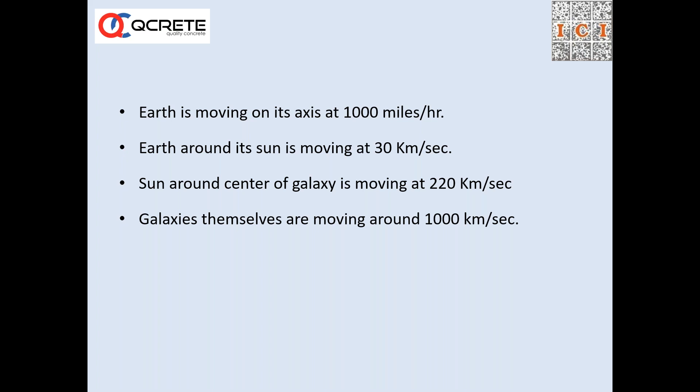We have seen many catastrophes, and many things have not been recorded for the last 40 years. Recently they have found an 8,000-year-old archaeological site in Saudi Arabia, which completely shifts our understanding of human civilization and the way it existed.

We had until now 5,000, 6,000 years of history. Now they have found settlements in Saudi Arabia in the middle of the desert, in a place called Al-Faw, where they're talking about the existence of irrigation and canal systems, which is unbelievable, given it's a desert. We know Saudi Arabia as a desert, and there is no such irrigation system possible, but it was there. Something happened—a small shift in the axis of Earth, or a small tilt in the way Earth spins around the sun, or something like that, which we don't know, has caused all this.

So we are adding our own things to this unbelievable and unimaginable world. We are also trying to add our own bits that spoil the atmosphere, which is causing huge damage to it.

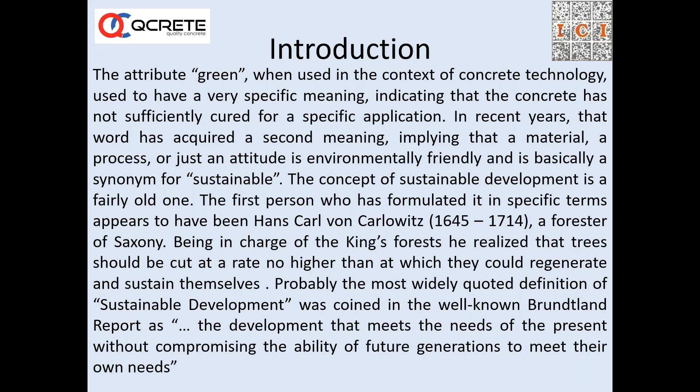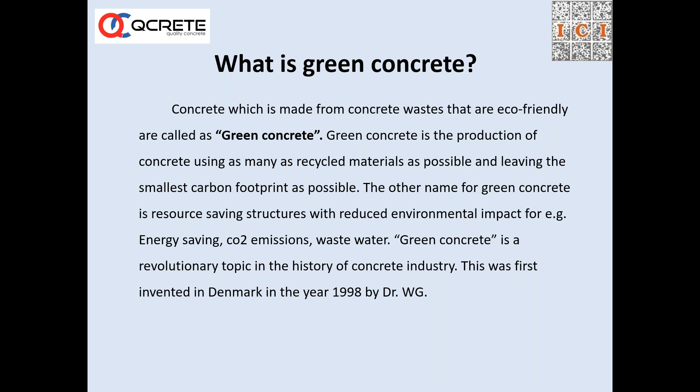So green concrete is one which is eco-friendly, where there is usage of industrial waste and recycled materials, and which has a reduced impact on the environment. This concept itself was introduced by a Danish person, Dr. W.G. So if you want to do green concrete, we need to first be aware of the materials that help us do green concrete.

They can be classified into three categories. One is the very popular materials in India: fly ash, GGBS, microsilica. These products also include rice husk ash and even metakaolin. But generally in India, we talk about abundant usage of fly ash, GGBS, and microsilica.

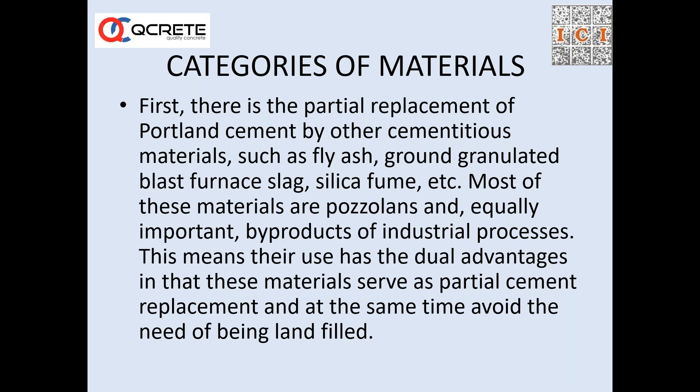The next category of materials are already-used materials: post-consumer glass, recycled concrete, scrap tires, plastics, carpet fibers, and all kinds of fibers, and fillers which can be used in either cement or concrete, like limestone filler. Cement is blended with 10 to 15% limestone powder—that also falls in this category.

So generally these materials are waste products or byproducts of other streams. In India, the usage of this category of materials is very limited at this moment, but sooner or later it is going to pick up.

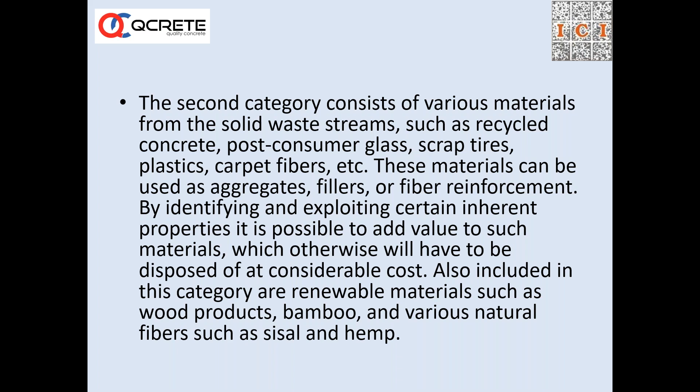The third category is a big one already in use in India. It consists of materials which help us reduce cement consumption, increase strength, or add other properties to concrete. For example, admixtures help us transport the concrete, alter its setting time, and add many other properties. There are also other novel additives that help reduce cement content, commercially known as iQcrete.

These kinds of products help us make better mix designs compared to reference concrete mixes. Then there are other materials which can be added to reduce thermal conductivity. And many other materials are available, like carbon nanotubes, graphene oxide, and these products which can also help improve the properties of concrete.

There are other technologies now where we are talking about curing concrete by using carbon dioxide. One of the companies, CarbonCure, is making that. These are the third category of materials, so the different categories of materials can be combined and effectively harnessed to make green concrete.

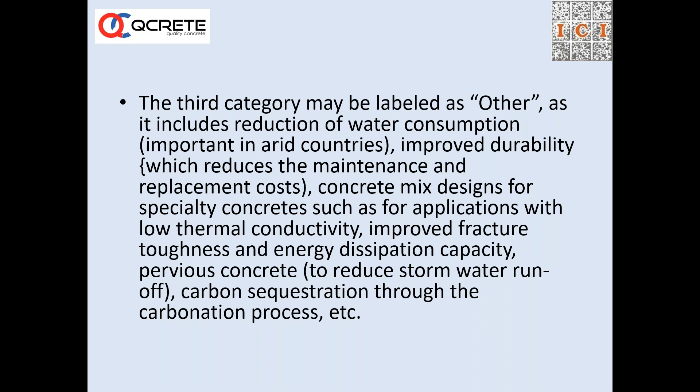The aim of green concrete is to reduce environmental impact of concrete, basically. Together with this, when the designer starts trying to do green concrete, he takes help from structural design specification, manufacturing, maintenance, including all aspects of performance, where there is a consideration of mechanical properties, fire resistance of the material, workmanship, durability, thermodynamic properties, and most importantly, environmental impact. So all these are considered, and especially durability is one of the major aspects of green concrete.

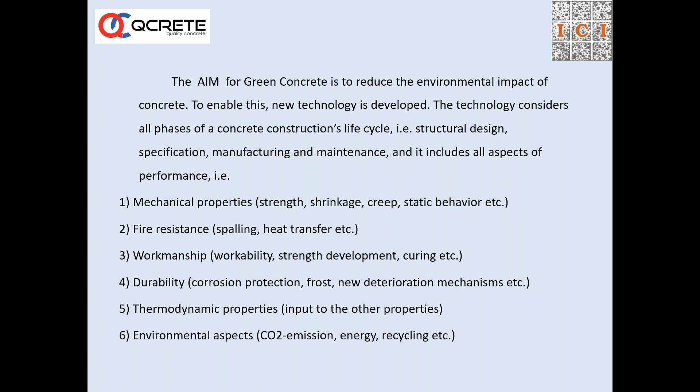So when we are talking about green concrete, we also go with the term sustainability - meeting the needs of the present generation without compromising the ability of future generations to meet their needs. So anything we do today should not deprive future generations of getting similar materials at approximately similar costs. For example, we are using concrete or cement now. Let us say in 50 years, cement costs 15 or 20 times the present cost. That becomes a costly affair and discourages the usage of cement itself, so that becomes unsustainable.

An American Indian proverb says, treat the earth well. We do not inherit the earth from our ancestors; we borrow it from our children. A beautiful proverb which puts a big emphasis on the type of usage we have to do with respect to natural resources.

Of course, in India, 5,000 years back, there is a lot of literature written where it talks about not cutting trees because they remove pollution, not disturbing the sky, and not polluting the atmosphere. So this kind of literature is already available in India.

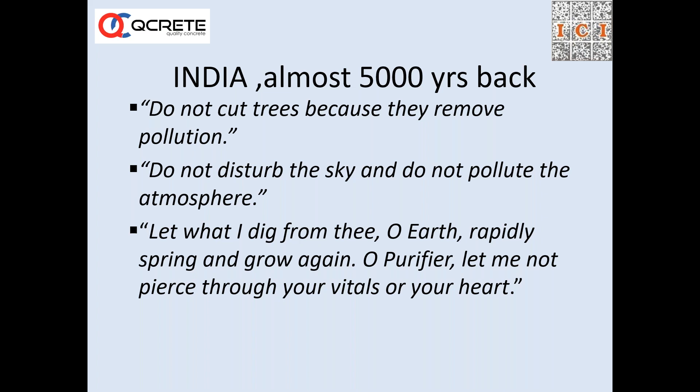Most recognized sustainability programs primarily focus on energy conservation, atmosphere, water quality and resources, site selection and development, indoor environmental quality, and material quality and resource. It is these complex relationships that present challenges for achieving greater sustainability.

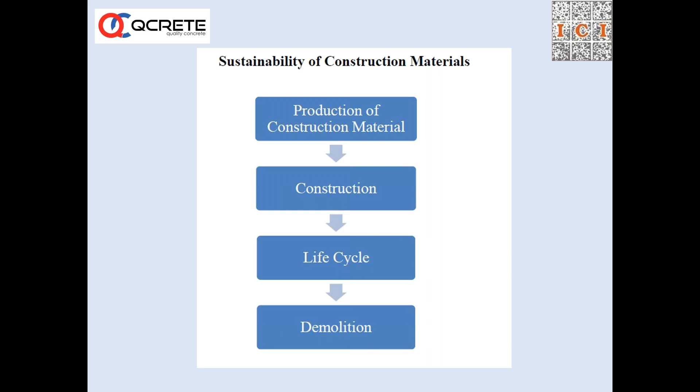So in terms of construction materials, whether it is concrete or any construction material, there is production, construction, life cycle, and demolition. The figure shows various stages of construction materials. Any type of construction material is produced with some raw materials or combination of raw materials, and production is associated with the consumption of energy and releasing some quantity of waste. Therefore, the production phase is important to consider while we deal with environmental impact.

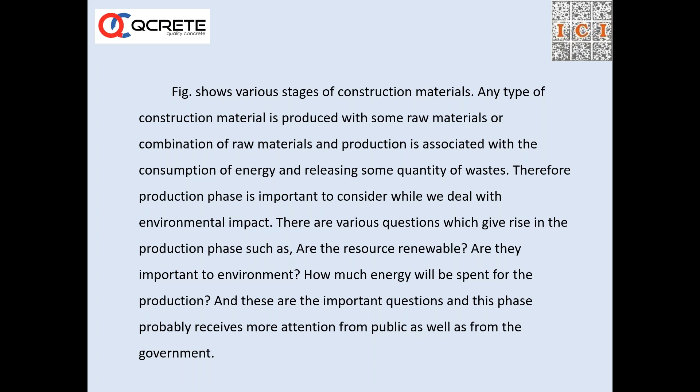There are various questions that arise in the production phase, such as: are the resources renewable? Are they important to the environment? How much energy will be spent on production? These questions are important, and this phase probably receives more attention from the public as well as the government.

So two important concepts of sustainable development: meeting the essential needs of the world's inhabitants, and recognizing the limitations of technology and society's ability to meet present and future needs. So sustainable development, including construction and concrete, should consider how land is used, water is used, atmosphere, judicious usage of material resources, indoor environment, and work environment.

For example, concrete, every cubic meter of concrete, we use about 180 liters of water. For curing also we use water. This is a huge activity for curing and for production of concrete. In fact, in ready-mix companies, many have started recycling wastewater after cleaning the trucks, which is a very good development. Even still today, many ready-mix companies have the habit of using fresh water for washing the trucks. So usage of water is going on unabated without any hindrance.

We have to know here that only 4% of the total water available on this planet is fresh water, and in that 4%, some of the water is locked in glaciers and icebergs, and also some of it is locked on the Earth's crust.

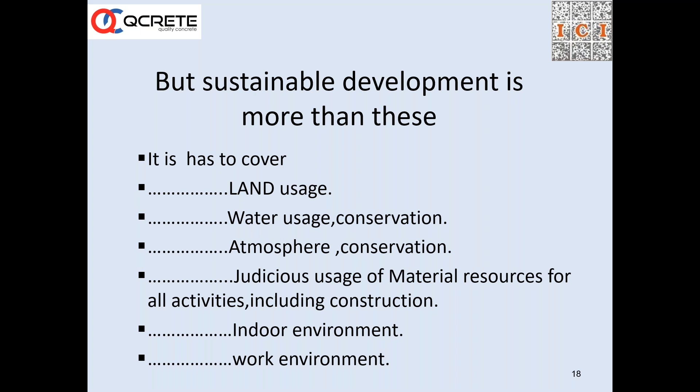Having said all this, concrete is still a wonderful material. Its impact is least when compared to steel and wood. So if somebody is constructing a building just because he wants to construct quickly for convenience, the impact they are causing on the environment is higher than a concrete built or a mud built home.

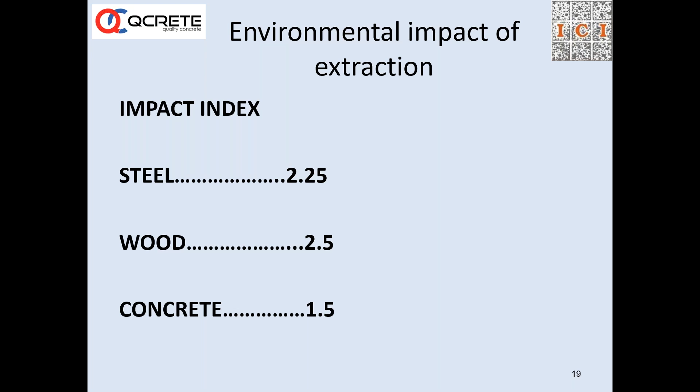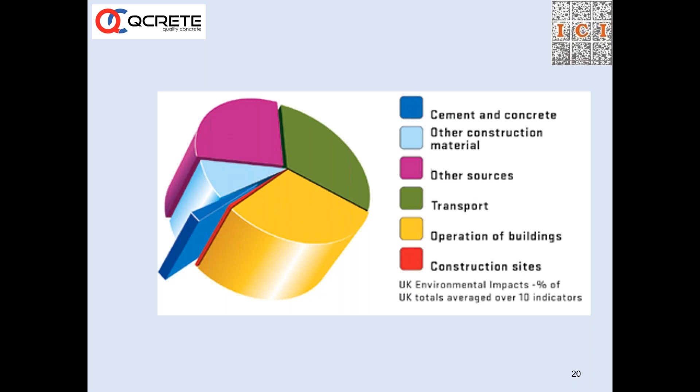So here we see, even though cement and concrete has the least impact on the total environment when compared to other activities of human beings like transport and operation of buildings, etc., still we have something to control. We can control what we can control as civil engineers and concrete technologists. So we have to focus on this cement and concrete.

So what is the problem with concrete? The problems are rooted in the manufacturing of cement, material acquisitions, and use of water. As we said earlier, use of water and then cement. If we are manufacturing 1 ton of cement, we need 1.55 or 1.6 tons of limestone. It has to be quarried, transported, and crushed. And this is a very energy intensive process.

And the next point is the OPC. As we are manufacturing it, it generates about 800 to 900 kg of CO2 per ton of cement manufactured. And OPC is the one material which is a synthetic product in the concrete, and it tends to go back to its natural state. So limiting the OPC is prudent and important because in that way you are increasing the stable components of concrete.

We also know that if we increase cement consumption in concrete, every 100 kgs of cement increased per cubic meter will give rise to a temperature rise of about 11 to 13 degrees, which will increase the core temperature of concrete. And the temperature differential, if it goes beyond 13 to 15 degrees, thermal cracks will be there in the body of concrete, which will make the concrete deteriorate faster or become undurable.

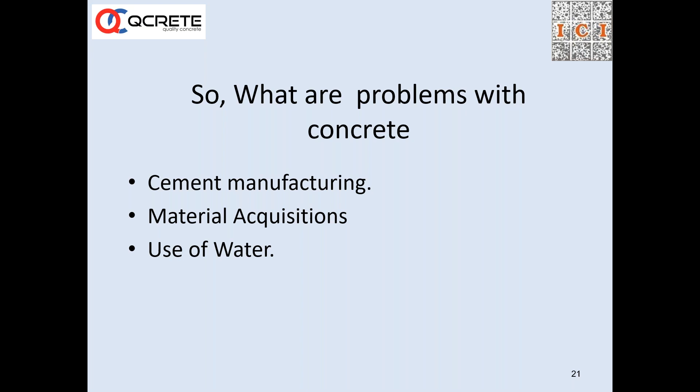We can see here 6% of carbon dioxide emissions come from global cement production, which is huge. Aggregates and sand involve huge mining, crushing, and transportation. Billions of tons of aggregates are crushed and transported for making concrete every year, so this is not a small thing. Earlier, sand mafia and dredging of sand have changed the paths of rivers, and many times it has completely disturbed the environment in many areas.

Now, thanks to the introduction of so-called manufactured sand or crushed rock fines, which is a byproduct from the stone industry or crushed rock industry, we have a better situation. We are moving towards more sustainable concretes due to 3-stage VSI crushers, etc., where judiciously good graded sands based on crushed rocks are coming out.

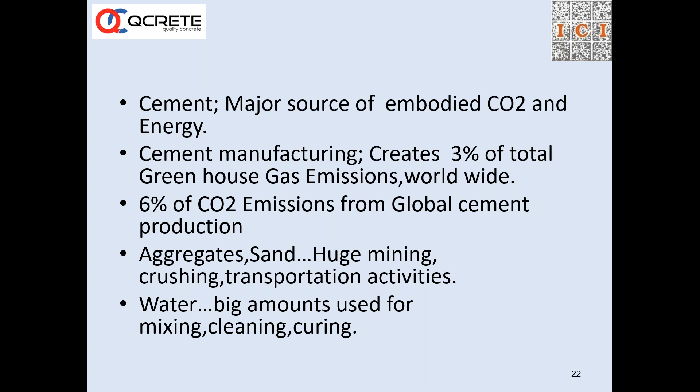As we already discussed, water is being used in big quantities for mixing, cleaning, and curing. One of the authors, I have forgotten the name, says 50 billion tons of aggregate is crushed and transported, and it is enough to make a blanket over the entire United Kingdom.

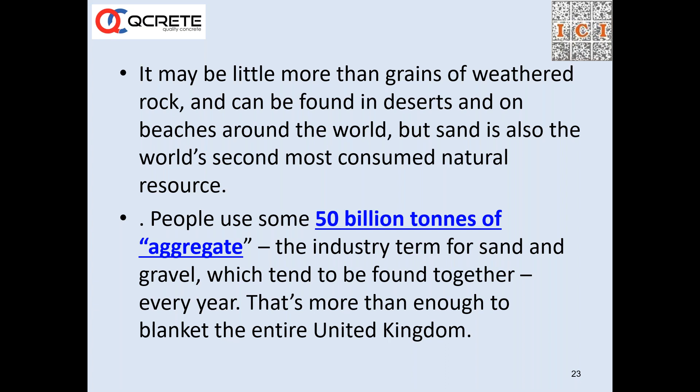Sand is also being used for making glass, which is another important material in the construction industry. Together, manufacturing of glass and manufacturing of concrete constitutes a huge portion of sand usage, which is environmentally bad. So what is the green approach? The green approach is to become environmentally responsible.

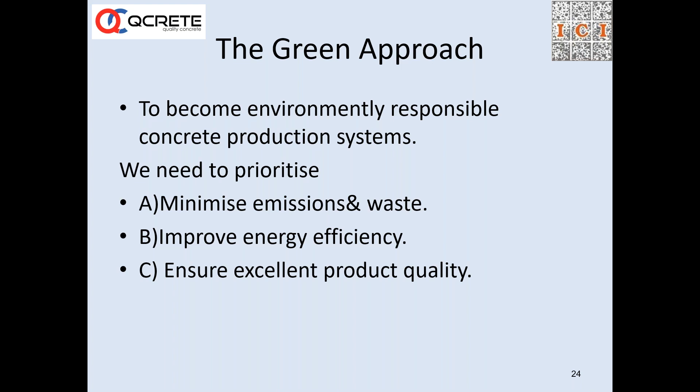We need to make better concrete production systems, minimize emissions and waste, improve energy efficiency, and ensure excellent product quality. By having complete control on the mix design, water-cement ratio, and usage of good materials including SCMs, we can ensure better quality and reduce emissions also.

So reduce concrete usage by reduction of thickness of members, use less binder material—especially OPC, as we have discussed—use supplementary cementitious materials, and use high performance chemical admixtures.

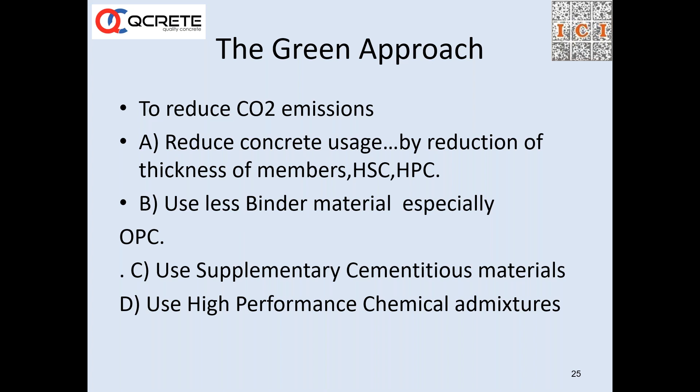The scope in India is huge, because India is the second largest manufacturer of cement in the world after China, and ready-mix concrete is still growing faster. We have the infrastructure and huge projects coming up in infrastructure and other segments of the concrete industry. Being concrete technologists, we can utilize the experience and knowledge to make greener concrete and make a positive impact on the environment.

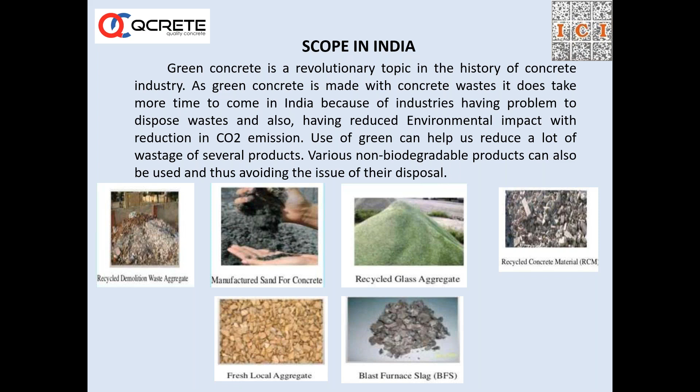One of the most significant contributions by the ready-mix industry in India, starting from I can say 2000 to 2022—the last 15-20 years—is the good increase in usage of pozzolanic materials, especially fly ash and GGBS. You can see most ready-mix companies either using GGBS or fly ash, and we have modern concretes which have been absorbed by the ready-mix concrete industry, having a positive impact on the rate of construction and quality of construction. There is also significant usage of industrial waste like fly ash and GGBS.

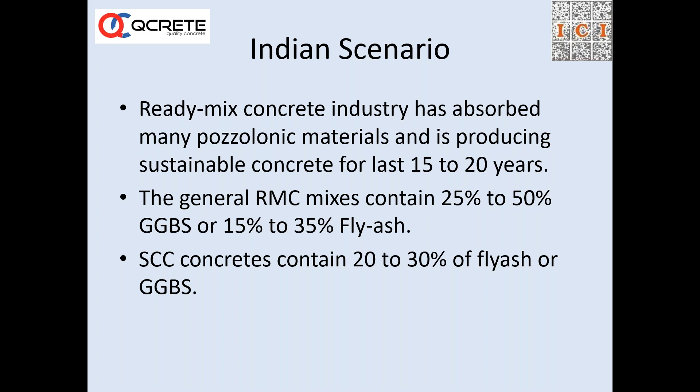Use of pozzolanas, it goes without saying, helps make durable concrete—here is how these pozzolanic materials contribute. This is the basic microscopic structure of different materials: fly ash, Portland cement, and slag. What I want to bring to attention here is that fly ash particles are spherical in nature.

When the particles are spherical, it gives better workability, and it is said that if we replace about 25% of a mix with good quality fly ash, it gives a water reduction of 6% to 8%. When this water reduction happens, automatically the durability and other properties increase.

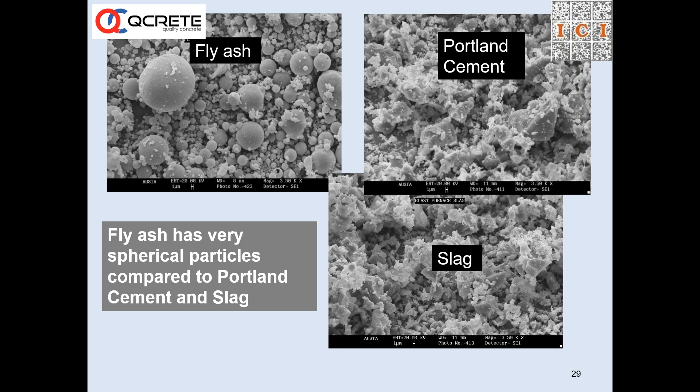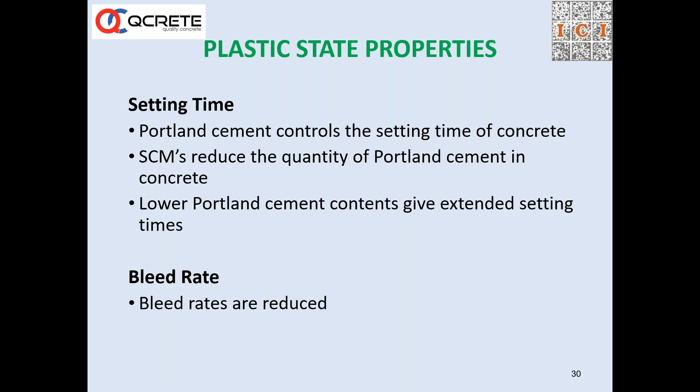We have seen huge usage of fly ash and GGBS, and the contribution to the concrete industry by these two materials, apart from making concrete greener, is that the setting time is better—I mean setting time is longer, which allows the user and concrete producer to use the concrete for a longer period and transport it for longer distances. Bleed rates and other things are improved, cohesion is improved, workability is significantly improved especially with fly ash, and pumpability is improved.

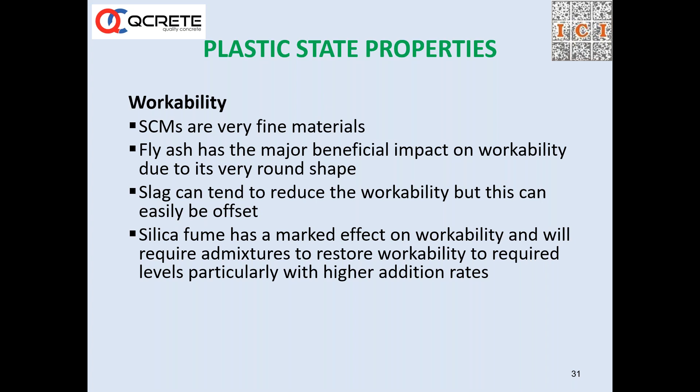Silica fume, in this direction, is a killer of slump—it means it reduces the slump, but of course you can compensate that with usage of better admixture or higher dosage of admixture. Pumpability and finishability are definitely better, and hence the cover concrete becomes denser if the finish is good, so chlorides and sulfates cannot easily penetrate. If the finish has a lot of blemishes like crevices, chlorides and sulfates can enter. So the concrete cover becomes denser, better.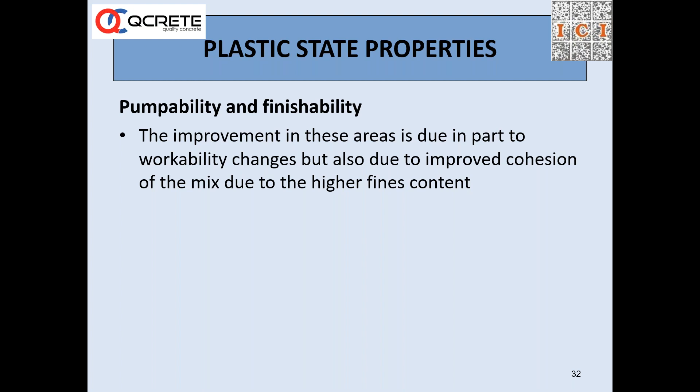This is one of the favorites that we always talk about: the strength. OPC is a dead horse after 28 days, meaning it will not gain much strength after that. But when you blend OPC with GGBS or fly ash, the curve goes up significantly, contributing to higher strengths at later ages. So OPC cannot match these supplementary cementitious blended concretes.

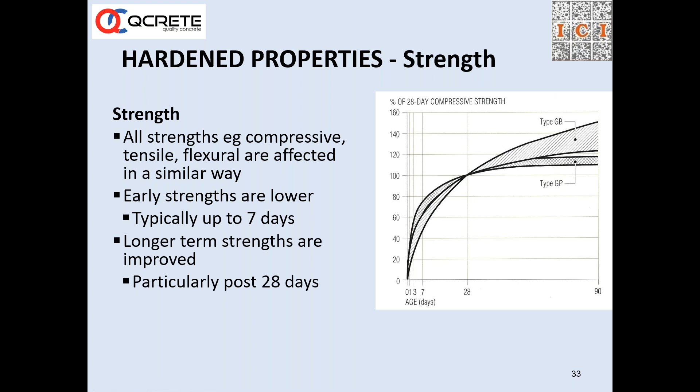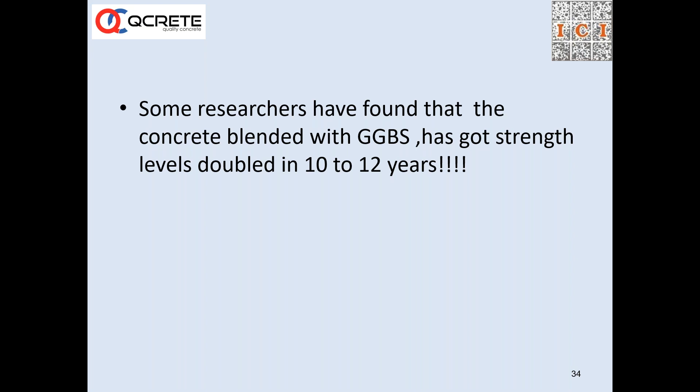Some researchers have found that when concrete is blended with 50-60% GGBS, the strength levels have doubled in 10 to 12 years. A customer who theoretically has a 30 MPa concrete will probably end up with 45 or 50 MPa, based on the type of reaction and the reactivity of both GGBS and OPC. He may end up with M50 concrete after maybe 10 years. So this is a huge contribution in terms of strength, and we'll come back to durability later.

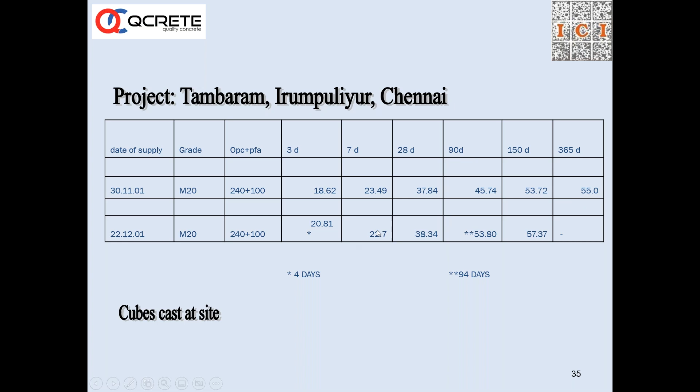This was one of the cubes cast on site, on a church site in Chennai, and we can see the jump between 28 days to 365 days, from 37 to 55 MPa. This is fly ash from Ennur near Chennai.

Several, I can say thousands of results, each an average of 3 cubes, were taken from Coimbatore, with fly ash from Tuticorin and several brands of cement. We can see a significant jump of 40% between 28 days to 90 days.

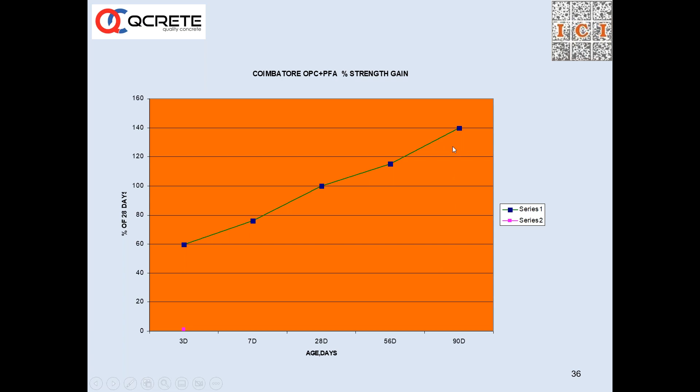Temperature rise is less when you are using GGBS or fly ash. GGBS lowers peak and overall heat, reduces thermal stress, and reduces micro cracking.

Optimum substitution is 60 to 70%. IS code permits usage of GGBS between 25 to 70%, but there are many projects in India where they use only 10% or 5%. If we use very little of this material just for the sake of using it, it will not enhance performance. And if there's already a quality problem with the cement itself, this adds to the problems. So it doesn't give any result at a very low dosage. We need to add approximately 35 to 50% to get good performance.

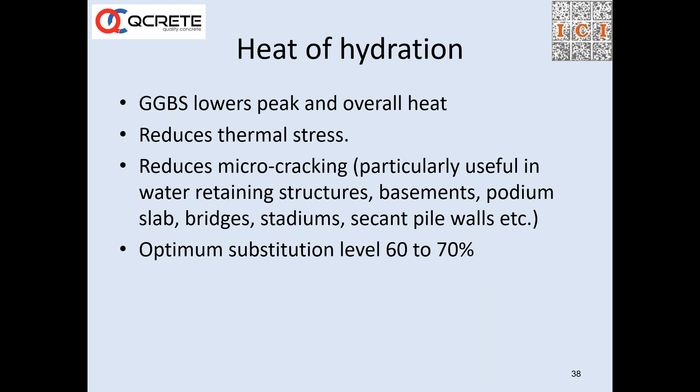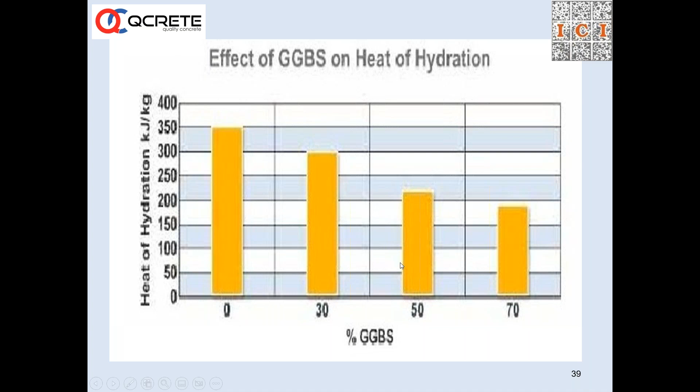I'm talking about GGBS. In terms of heat of hydration, when you have 70% or 50% GGBS, there is a tremendous reduction in heat generated, which helps contain the total heat in the initial stages and enhances durability eventually.

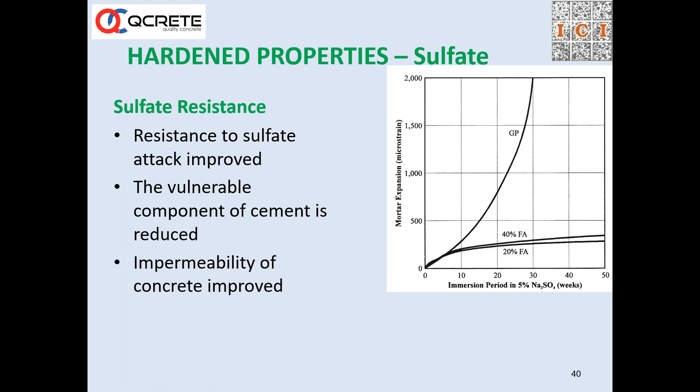Sulfate resistance is another aspect significantly improved by addition of pozzolanic materials. We can see here fly ash addition of 20 to 40% against general purpose normal cement, where expansion goes almost parallel to the x-axis, meaning expansion is less. Expansion is maximum when you're talking about OPC. So resistance to sulfates is enhanced, and resistance to chlorides is enhanced.

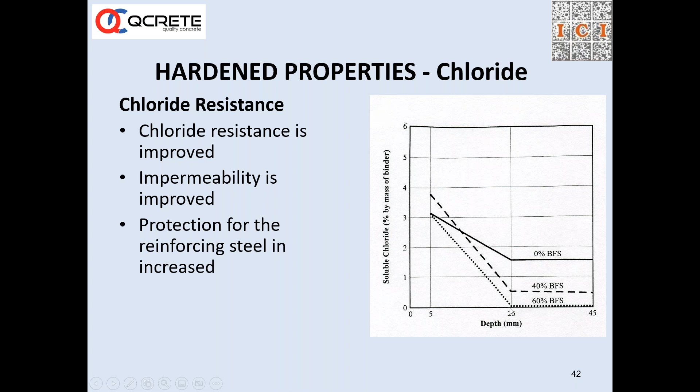We can see here when adding 60% GGBS, there is no chloride penetration at a depth of 25 mm in a concrete system.

So, resistance to chloride - another slide talks about time to corrosion initiation. When 60% is added, it takes 50 years for corrosion initiation. Whereas with 100% OPC, we have very quick initiation within about 10 to 12 years, and the time of first repair is here.

So what is this important thing we are talking about? When we are making green concrete using GGBS or fly ash, the durability is enhanced. You have long-lasting structures, and hence you need not repair them. You need not invest again in bringing new materials, new raw materials, new cement for construction - and hence your overall sustainability is improved, durability is improved.

It is estimated that in many countries, there is a huge cost waiting. For example, in India also, as bridges and infrastructure get older, if there is gross negligence in these areas during construction, and materials were not used properly - if some of these SCMs, especially GGBS or fly ash, are not used in the right quantity - repairs will come much faster, and the repair costs are huge, with a huge impact on the national economy.

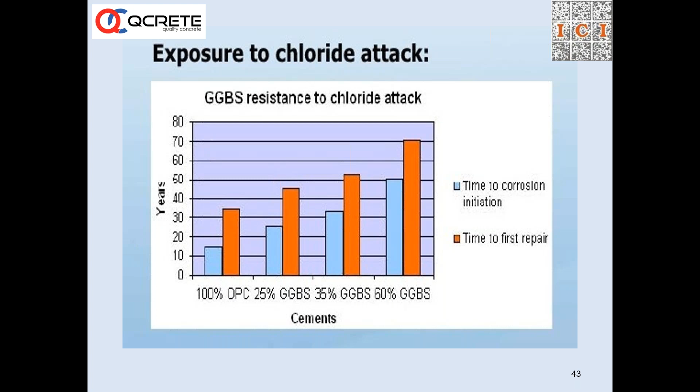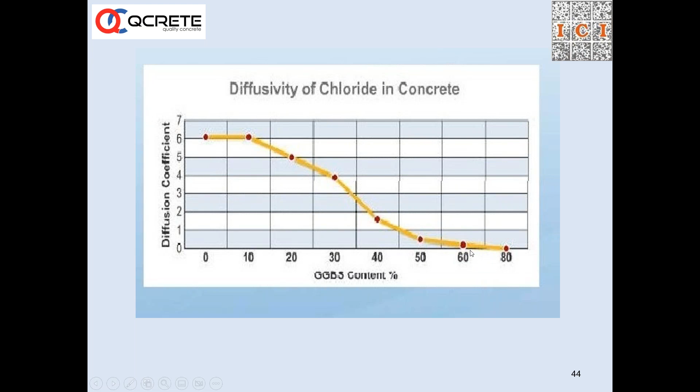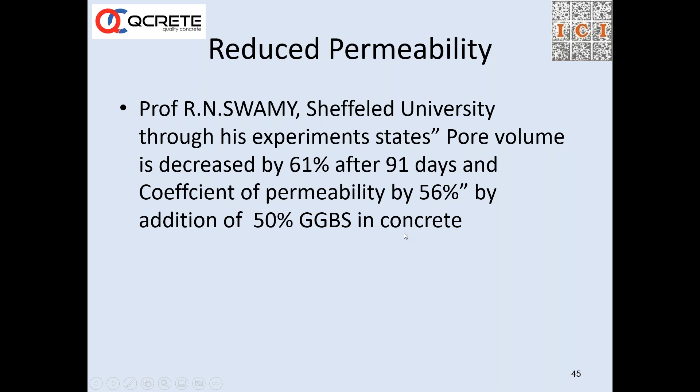Another slide showing the diffusivity of chloride when GGBS usage is increased between 60 to 80%. At that range, diffusivity is almost nil. Professor R. N. Swamy says there is a tremendous improvement in permeability, with a reduction of almost 56% when 50% GGBS is used. So there is tremendous possibility of enhancing durability when using fly ash or GGBS.

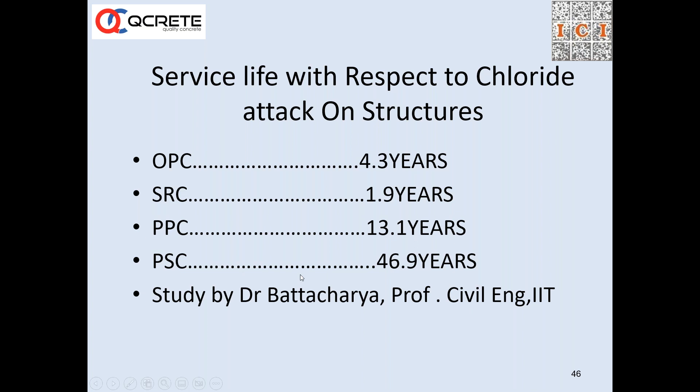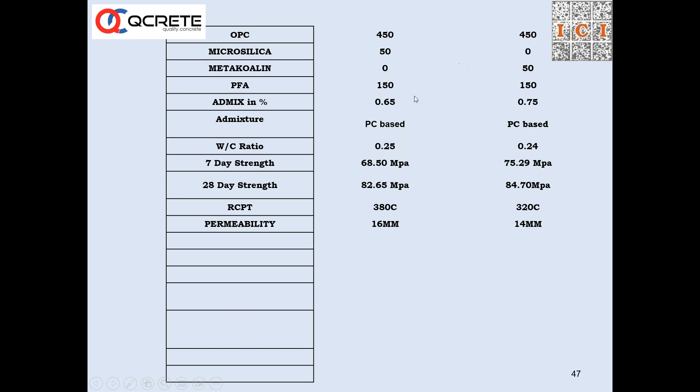Professor Dr. Bhattacharya of IIT has talked about service life with respect to chloride attack - what happens to different materials when chloride attack occurs. If concrete is made with only OPC, you can compare that with PSC. Different materials like microsilica, metakaolin, and fly ash can be used to make highly durable concrete. RCPT values below 500 represent highly durable concrete in a chloride environment like coastal areas, so you can push concrete to higher durability using these materials.

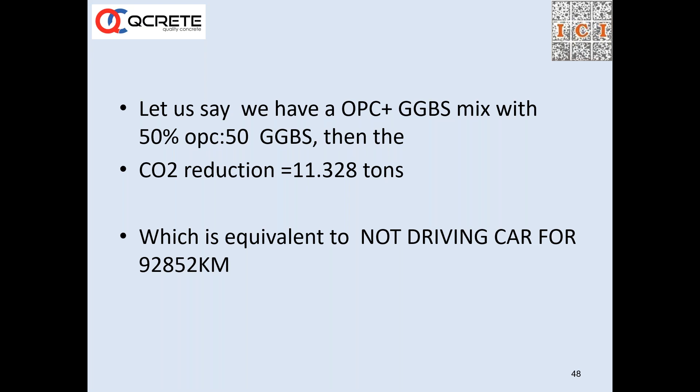An example is given: let's say we do an OPC plus GGBS mix, 50% 50%. They have calculated this is equivalent to not driving a car for almost 92,000 kilometers. So if we do such mixes wherever possible, and try to change the specification and convince the specifiers to use GGBS, we can contribute to reducing carbon dioxide emissions in a big way.

Another positive impact of using GGBS or fly ash is that, being lighter in color, it contributes to reflectivity of light, represented by the albedo value. Snow has an albedo value of 0.9, while black paint has an albedo of 0.05, meaning black paint absorbs most light. If you have 50% GGBS concrete, the albedo number is around 0.5, meaning reflection will be better.

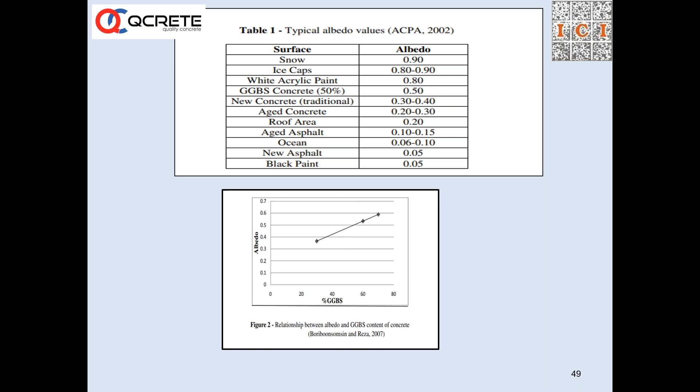People can see better for longer distances, and lighting required is reduced - you don't need as much lighting. This means you can reduce the energy consumed for lighting. This is an additional effect of using these materials, which helps make concrete and construction greener.

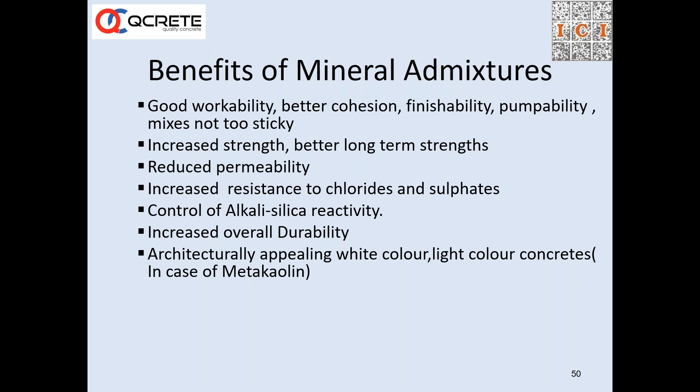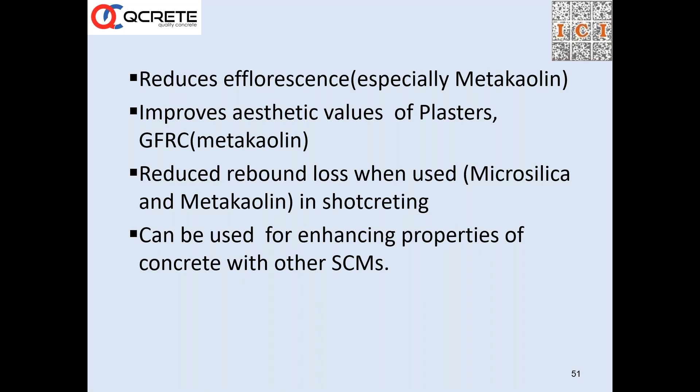In short, benefits of mineral admixtures include: good workability, better cohesion, finishability, increased strength, reduced permeability, increased resistance to chlorides and sulfates, control of alkali silica reactivity, increased overall durability, and architecturally appealing light-colored concretes. If using metakaolin and similar materials, it reduces efflorescence, improves aesthetic values, and reduces rebound loss in shotcreting - these can be used for enhancing properties of concrete with SCMs.

If we compare different materials in terms of embodied energy - the energy used for production and transportation - we can see that for transporting any of these materials it's around 175 to 100, and aluminum has higher embodied energy during production compared to Portland cement.

So even with all the people blaming concrete and cement, cement is still a good material that we have to use. We discussed negative things about OPC, but positive things exist too - quicker construction, quicker stripping of side shuttering, and things like that. OPC is still head and shoulders above, unless you're using a very advanced admixture with a certain percentage of SCM. So OPC is still a winner in some cases, not bad.

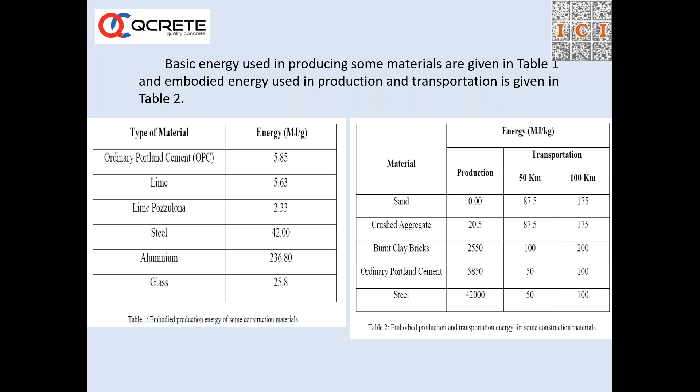So what are the carbon dioxide reductions possible if we use SCMs? For a 335 kg mix with 0 kg of fly ash or 0 kg of GGBS, the carbon dioxide emissions are 313 kg per cubic meter.

If we go to 282 kgs of cement and 94 kgs of fly ash, it comes down from 313 kg per cubic meter to 160 kg per cubic meter. And when we go to the same mix with 376 kgs of OPC, now 188 OPC and 188 GGBS, it has come from 211 to 112, almost 50% reduction in carbon dioxide emissions. So if we can shift from one mix to another, we are moving significantly up and making better, greener concrete.

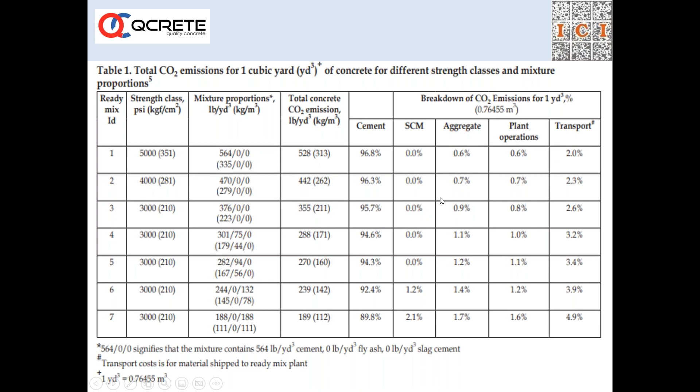Suitability of green concrete in structures: it reduces the dead load of structures because the density of concrete made with SCM is slightly lesser compared to concrete made with OPC. A reduction of emissions by 30 to 50%, let's say 30%. Increase in concrete industry's usage of waste products by 20%. Good thermal and fire resistance compared to traditional concrete. Improvement in permeability and usage of new types of residual products, like red mud and many other products.

I want to talk a little about the usage of recycled aggregates. Recycled aggregates have not picked up so well in India. In other countries, recycled aggregate and recycled fine aggregate from building waste is being used successfully, especially in countries like Japan. They use a huge amount of this building waste incorporated into their concrete.

The problem with using recycled coarse aggregate and recycled fine aggregate is it also comes with some other building waste, like probably gypsum and paint, etc. So putting all this into concrete will not give similar or better strengths, and it has to be added in a controlled way. Even though we can classify this as greener concrete, it many times becomes costlier because the building waste has to be transported to a crusher and then crushed, and collection, transportation, and crushing will take some time.

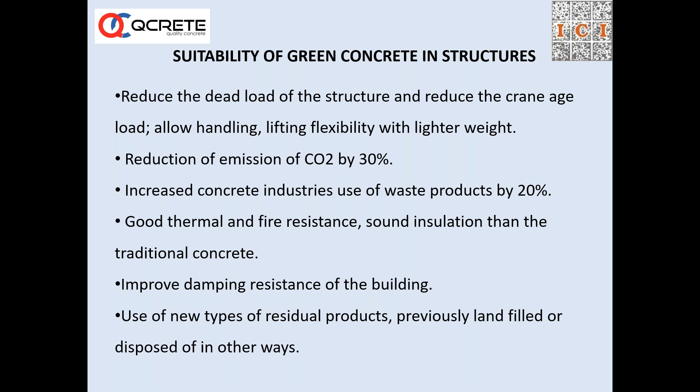Coming back to suitability, it requires less maintenance and repairs. Compressive strength behavior of concrete with water cement ratio is more than that of conventional concrete many times. Flexural strength of green concrete is almost the same. Carbon dioxide neutral waste-derived fuels shall substitute fossil fuels in cement production by at least 10%.

Use of concrete industry's own residual product - in a way, ready-mix concrete has contributed well. Many companies are using 25% to 50%, sometimes 100%, of the wastewater generated to be incorporated back into the concrete. So greening of concrete is going full swing.

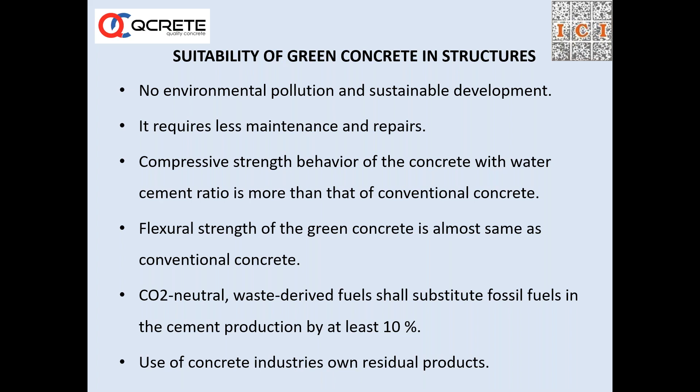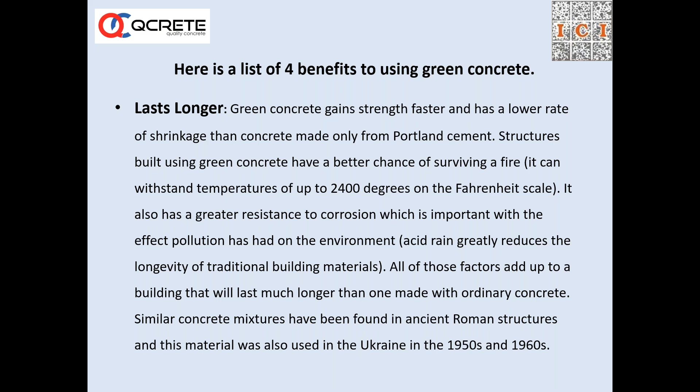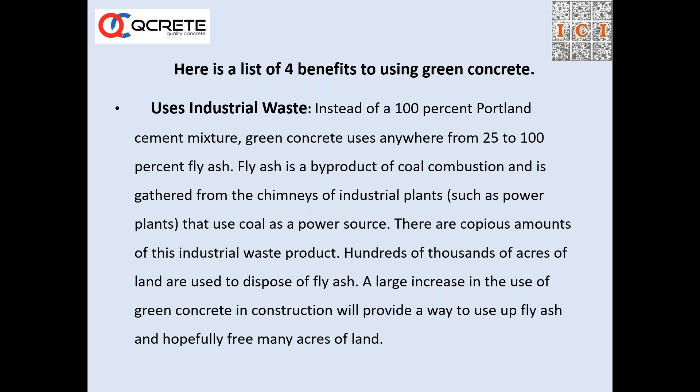Industrial waste, which otherwise would be dumped into landfills, is being used better. Earlier, we used to see mountains of slag near a steel plant. Now we don't, because it is effectively used for manufacturing GGBS. Hundreds of thousands of acres of land are used to dispose of fly ash. A large increase in the usage of green concrete in construction will provide a way to use up fly ash and hopefully free many acres of land.

It reduces energy consumption because of the better finish and better cohesive nature of the concrete. The materials used in Portland cement require huge amounts of coal and natural gas to heat up to the appropriate temperature to turn them into Portland cement. Fly ash already exists as a byproduct of another industrial process, so you are not expending much more energy to use it to create green concrete.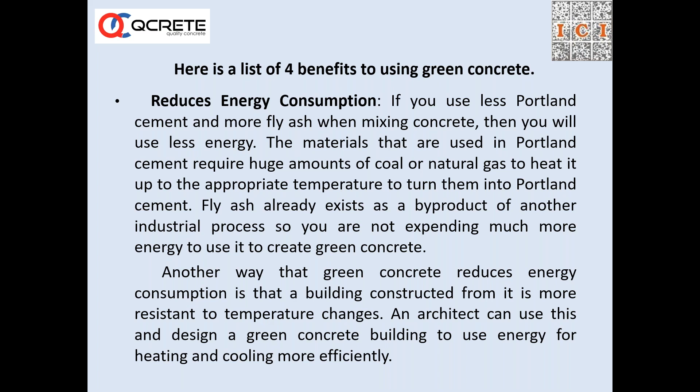Another way that green concrete reduces energy consumption is that a building constructed from it is more resistant to temperature changes. An architect can use this and design a green concrete building to use energy for heating and cooling more efficiently.

Green concrete reduces carbon dioxide emissions, which we already discussed. There are cases where a huge amount of GGBS, recycled aggregates, wastewater, and limestone filler along with cement has been used to make low carbon concrete, or even now the carbon capture technology, where carbon dioxide is pushed into concrete to cure. Carbon cure technologies are available, which make huge reductions in carbon dioxide emissions, and hence make the concrete greener and have a very positive impact on planet Earth.

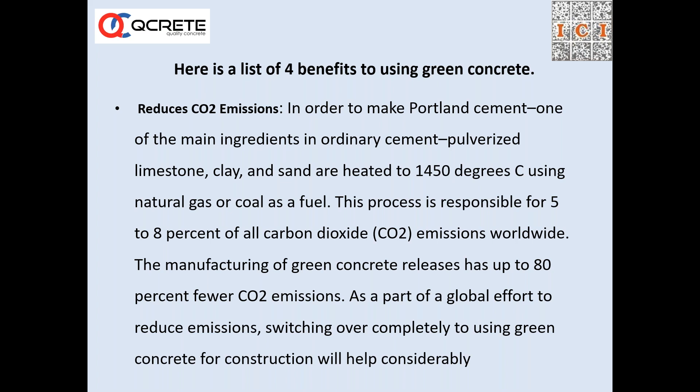So thank you. This is a brief introduction to green concrete, and I'm thankful to ICI Kochi chapter, and to QCrete Remix India MD and other organizers for giving me this opportunity. I hope the audience who have come late in the evening will have benefited from the experience or some words shared here. Thank you.